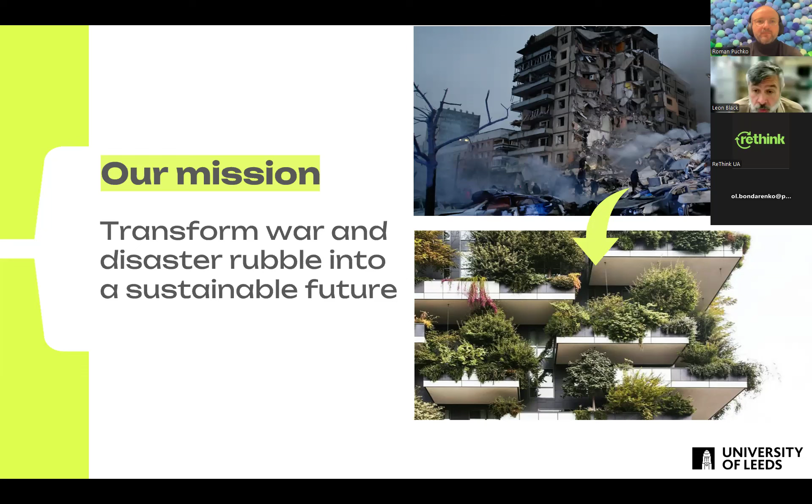We want to use it for total recycling of end-of-life concrete. Whilst the focus is on Ukraine, we're hoping the technology is equally applicable to other post-reconstruction operations, be those post-conflict, for example in Gaza, or also post-natural disasters.

The structure of my talk is split into 4 sections, starting off by saying why concrete has an environmental problem. Then I want to talk about recycled concrete aggregates and what they are. Then how these recycled aggregates behave when added to fresh concrete. And finally, I want to say how can we valorize or reuse recycled concrete powder, which is often considered somewhat of a problematic material for recycling, but actually holds great potential.

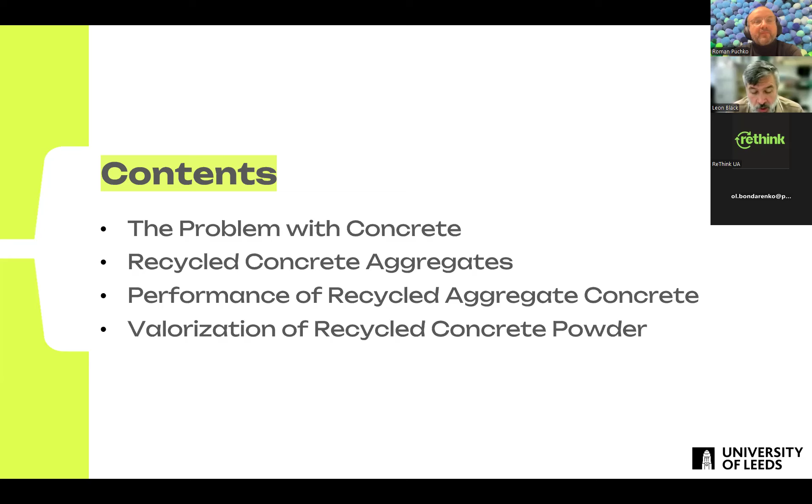Now, concrete has a problem. We use anything up to 30 billion tons of concrete each year, and that requires 4 billion tons of Portland cement. As a result, Portland cement production itself is responsible for up to about 8% of global CO2 emissions, and concrete production is around 10% of global CO2 emissions.

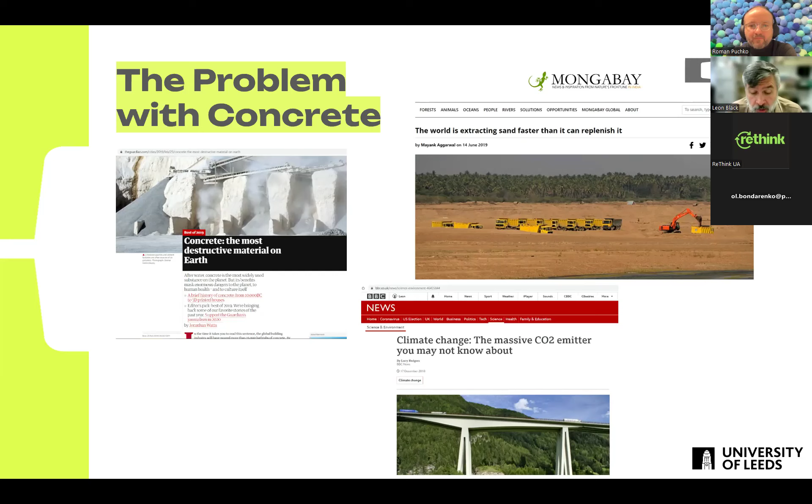In addition to these carbon emissions, there's also huge material consumption. Sand, for example—there was a report in India that sand is being extracted faster than it can be replenished. I was amazed to find out organized crime is involved in sand mining. I guess wherever there's money to be made, there's criminality involved as well. But it's causing environmental degradation, and we're trying to say, well, what can we do about it?

So if we go to more statistics around concrete, I've already mentioned the quantities of materials being used. But if we specifically look at end-of-life concrete, we produce 700 million tons of construction and demolition waste, CDW.

Of this 700 million tons of construction and demolition waste, about half is concrete, so 350 million tons per year. We know this can be recycled, but that doesn't necessarily mean that it is recycled.

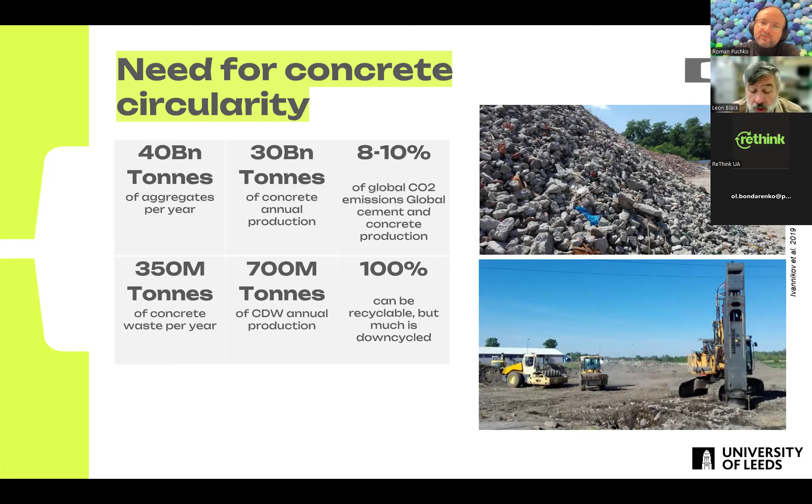In the UK, official figures say just under 94% of construction and demolition waste is recycled. But often this is in very low value operations. The figures on the right show a typical example. This isn't from the UK, but there is construction and demolition waste being reused simply to fill a hole. We can do far, far more than that, and we should.

This introduces the concept of a circular economy. Our current system is a linear economy, as shown. Many of you may have seen this figure before from Circular Flanders. It shows take, make, break: we extract materials from the ground, we make something with them, and when they're finished with, they're broken and thrown in a bin.

We're now moving more towards a recycling economy, where we may use something 2 or 3 or many times, but ultimately it still ends up being thrown in a bin. We dispose of it.

The circular economy, however, is what we're trying to achieve: introducing this concept of maintaining value within a system. Can we continually reuse a material with minimal loss of value, just to use resources more efficiently?

Now, for monolithic concrete, this is a problem. Most concrete is cast, not as prefabricated units, but...

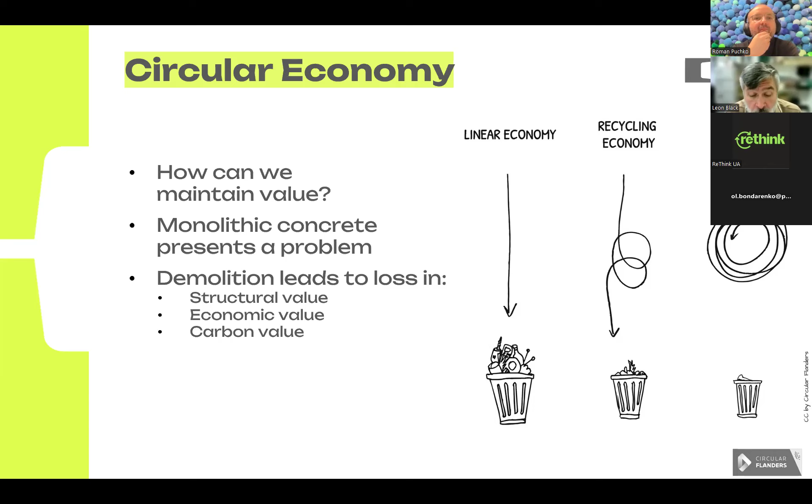So what else can we do? Well, if we're going to do things with end-of-life concrete, we need to know what it is. We can consider end-of-life concrete as comprising three components.

We have recycled coarse aggregates: gravel and stones between 4 millimeters and typically up to 20 to 40 millimeters in diameter. Then we have recycled fine aggregates, with particle size from 150 microns to 4 millimeters. And finally recycled concrete powder, a fine material less than 150 microns in diameter.

The figure on the top right shows recycled coarse aggregate. This was some material prepared in our lab. You can see that larger piece on the left-hand side.

Can I just ask, can people see my cursor when it's moving on the screen? I think so, yeah, we can see that. Okay, right, because I'm pointing to things on the screen and wasn't sure. I normally use Teams, so I didn't know whether Zoom allowed me to do this.

So yes, this piece of aggregate here, about 30 millimeters in diameter, 30 millimeters long, about 20 millimeters in diameter. You can make out this is the original aggregate, and it has mortar stuck to it.

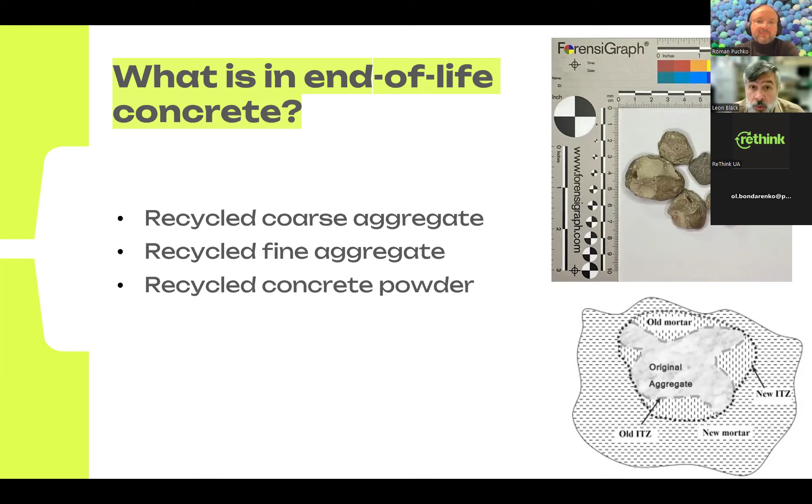In normal concrete, you just have the interface between the aggregate and the mortar. But in recycled aggregates, you have the original interfacial transition zone, plus one between original aggregate and new mortar, or between adhered mortar and new mortar. These ITZs are points of weakness, and we need to know more about them if we're going to improve our understanding of end-of-life concrete.

Now I want to show this quote. This was one of my starting points for looking at recycled materials. Thomas Rau is an architect who founded a company, Madaster, looking to develop material banks, considering the built environment as a material bank. His quote was, 'Waste is material without identity. If we don't know what we can do with a material, we end up throwing it away.'

So really what we want to do is say, what is recycled concrete aggregate's identity? What do we know about it? Well, we know that it's relatively inert, because otherwise it wouldn't survive within a concrete matrix. We know that it's dimensionally stable, we can't squeeze it, and it's not going to deform. We also know that it contains this adhered cement paste. So we know its size, we know it's not going to rot, and we know that this cement paste exists. That really is all we know.

We know the quantities as well. This figure on the right shows the mix on the left-hand side - these were the components going into some laboratory concrete that we were making, used as part of a PhD project. We crushed it to do some studies. We found that about 60-70% was recycled aggregate, coarse aggregate more than 4 millimeters in diameter, and then worked out about 15% each of recycled concrete paste and recycled fine aggregate.

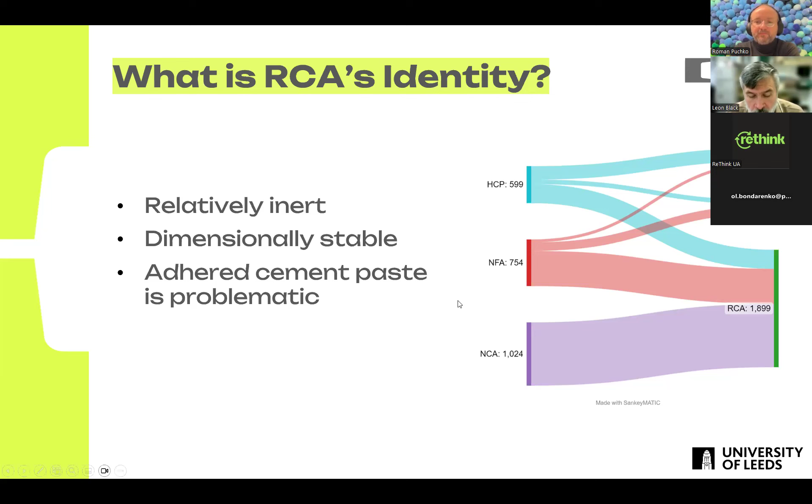So can we give recycled concrete more of an identity? What can we find out? What can we learn about recycled aggregates that, by understanding these properties, allows us to make better use of the materials?

Then looking at each particular size fraction, we measured the amount of cement paste stuck on each aggregate, and we measured the water absorption capacity. That's taking dried aggregate, putting it in a bucket of water, and measuring how much water is taken up and soaks into this slightly porous aggregate. We found that as the amount of paste increased, the water absorption capacity increased.

That's a problem for concrete, because this water absorption, if that water is taken into the aggregate, it stops the concrete from flowing. Contractors don't want to work with very stiff concrete - they want concrete to flow like water, I was once told. Anything less than that is a problem. So this water absorption capacity is a problem because it reduces the flow.

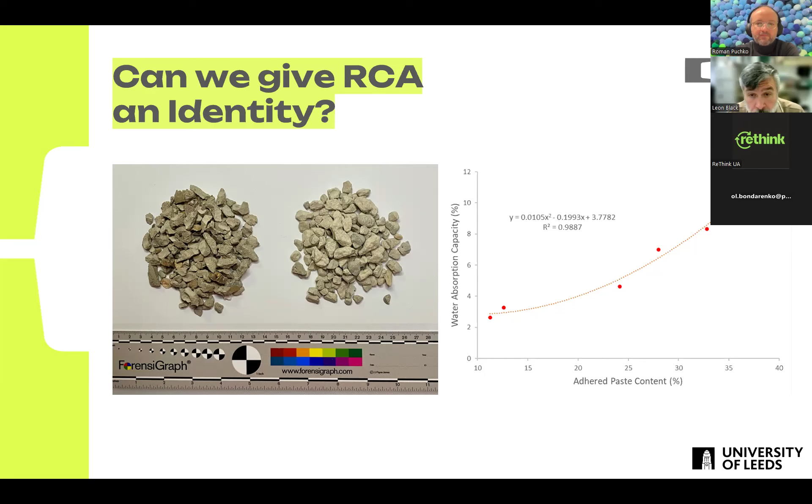But whilst we can do laboratory work to give this recycled aggregate an identity, to learn more about it, there are just realistically too many variables that can affect performance. The aggregate size and type is related to the water absorption capacity - as you get smaller aggregates, you get more adhered mortar, you get greater water absorption. You get a change in the relative proportion of surface that is interfacial transition zone. It just becomes incredibly complex, and whilst we can understand it conceptually, we don't have the resources to look at every single variable.

So what we started to do, as part of one project and also in S3, is look at data mining. There is lots of work going on around the world on recycled aggregates. We found 750 published mix designs - these had all been through peer review, so in theory they're all validated.

And we found 78 input variables. Everybody reports how much sand, how much water, how much aggregate, how much cement. Some people report the size of the aggregate, some people don't. Some people report the water absorption capacity of the natural aggregate that was used, some people don't. So we identified 78 different variables.

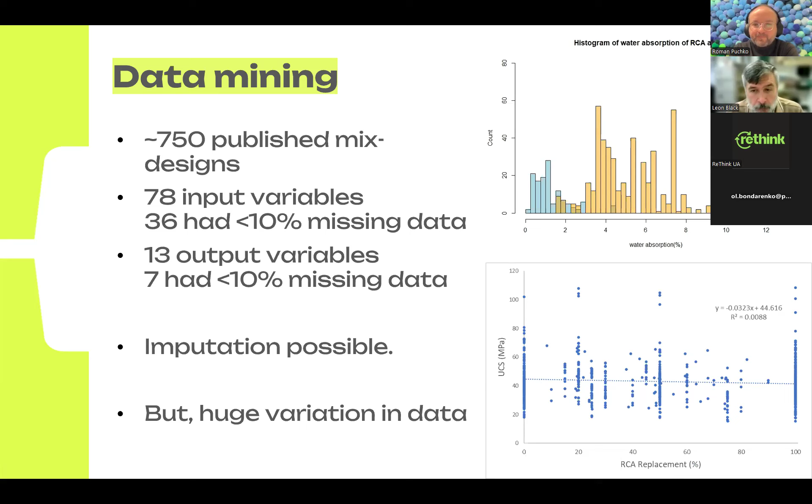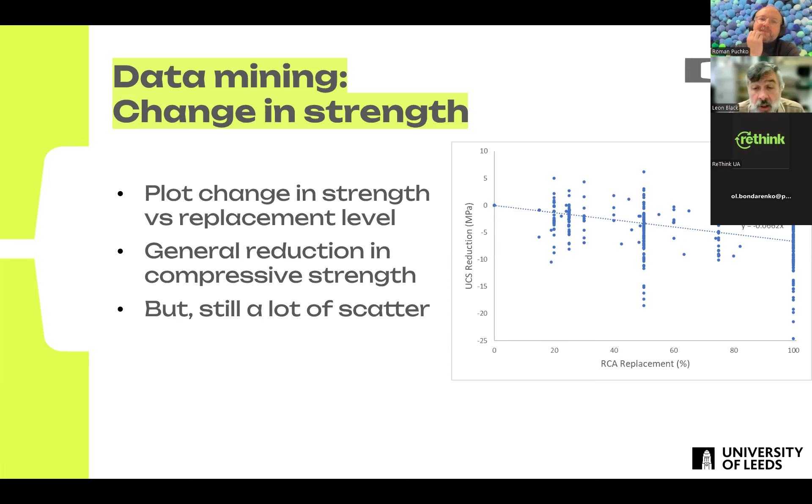This is where having these other input data, such as the water absorption capacity, becomes important. We started to plot the strength reduction as a function of replacement ratio for mixes with different water absorption capacities.

If there was a water absorption capacity over 5.8%, which is quite high, there was a more significant drop than if we could get the water absorption capacity between 4 and 5.8, or better still less than 4. If we actually get it below 3%, we're in a position where we can say this material is behaving very similar to natural aggregates. So we need to understand how we can remove this adhered mortar.

This is some of the work we've been doing in Leeds, and it's also some of what Everox are doing as part of their project in S3, which you'll hopefully hear about later.

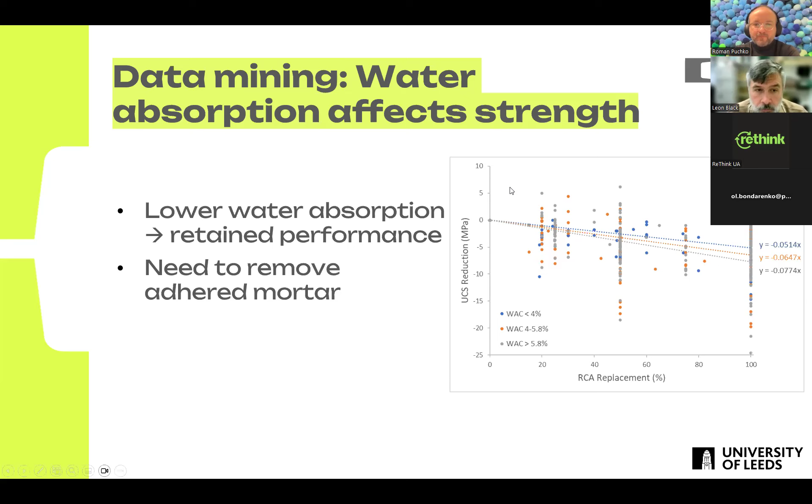We then said, we've got this recycled aggregate - instead of modelling, we're now looking back in the lab to see how this material behaves when you put it in concrete. So we made concrete with 100% recycled aggregate, replacing all of the sand and all of the natural aggregates, just using recycled and processed coarse and fine aggregate.

Because of the adhered mortar, there was a loss in slump - the concrete didn't flow quite as well. Our control mix had a slump of 140 millimeters, which dropped to 85 millimeters. But we could add a bit of additional water to correct for the slump, or we could add a super plasticizer, which brought the slump back to where it should be.

When we compared the 7-day and 28-day strength, we saw that by processing the aggregates there was no significant loss in strength. Indeed, in some instances there was a slight increase in strength, because the material we'd used in Leeds was a rounded aggregate, and once crushed it became slightly more angular, leading to a slight increase in strength. So we were able to see there really wasn't a loss in performance - we could correct any loss in slump, and make concrete comprising entirely of recycled aggregates.

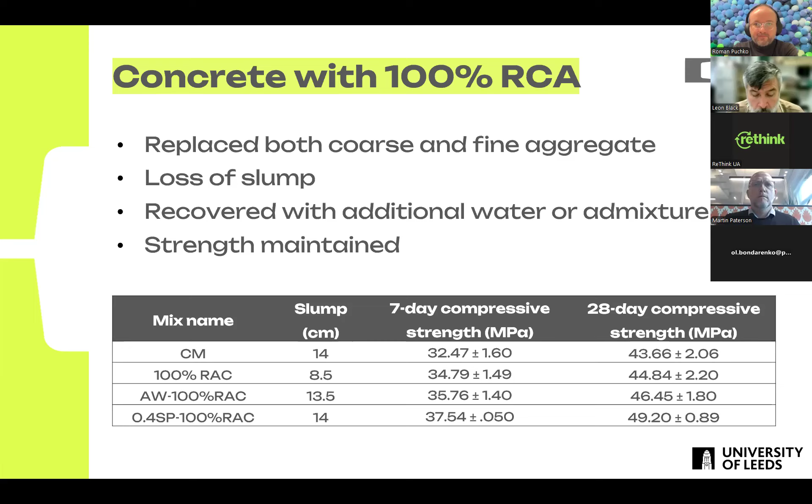But can we go further than that? We know that processing the aggregate improves performance, but going back to our earlier work where we looked at this Sankey diagram, looking at material flow, we know that about 12 to 15% of our recycled aggregate ended up as powder.

This is material less than 150 microns in diameter. We also knew that when we looked at the composition of this, about 80%, the blue material, was cement paste, and about 20% was recycled crushed quartz fines from the sand. So we said, well, what can we do with this? This is important because if you look at the carbon footprint of concrete, this cement paste accounts for about 90% of the carbon footprint.

So we're trying to say, well, how can we maintain some value within the system? If you think back to earlier where I was saying there was a loss in carbon value from monolithic concrete to recycled concrete, we're trying to say, can we reclaim that cement such that we're no longer having to make new concrete with quite the same high carbon footprint?

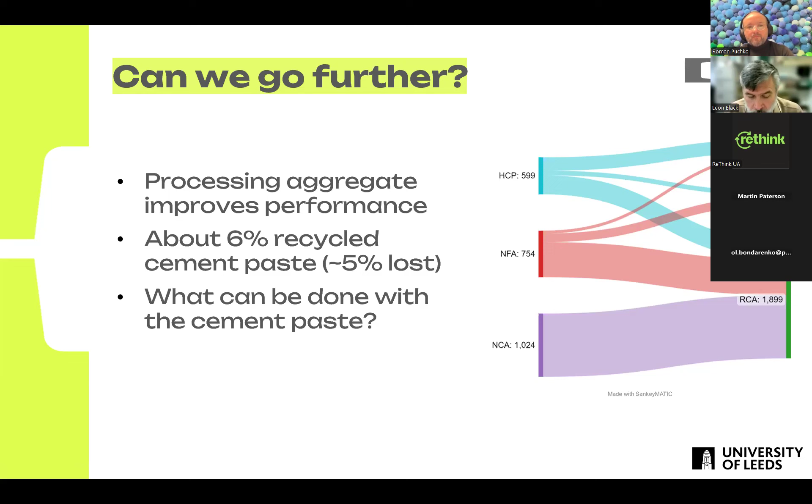So we looked at this material that was 80% cement paste. Ours was 80% cement paste, I've seen other samples anything between 60 and 80%. And we activated it by either heat and/or carbon dioxide. Heating drives off the water and can ultimately lead to some phase changes.

Adding carbon dioxide strips calcium out of your cement paste, converting your recycled cement paste into a mixture of calcium carbonate and an aluminosilicate that can act as a supplementary cementitious material. So it can be blended with cement, producing additional cementitious binder.

The standard test to assess the performance of a supplementary cementitious material is known as an activity index. You take 80% cement, 20% of your material, and if the compressive strength is greater than 75% of a reference mix, it's considered a suitable cement replacement.

What the table shows here is a range of the original material plus six different treatments. The as-received material has an activity of 60%, below this threshold. But all of the other treatments, either heating or carbonating, improved performance sufficiently that they could be considered suitable cement replacements.

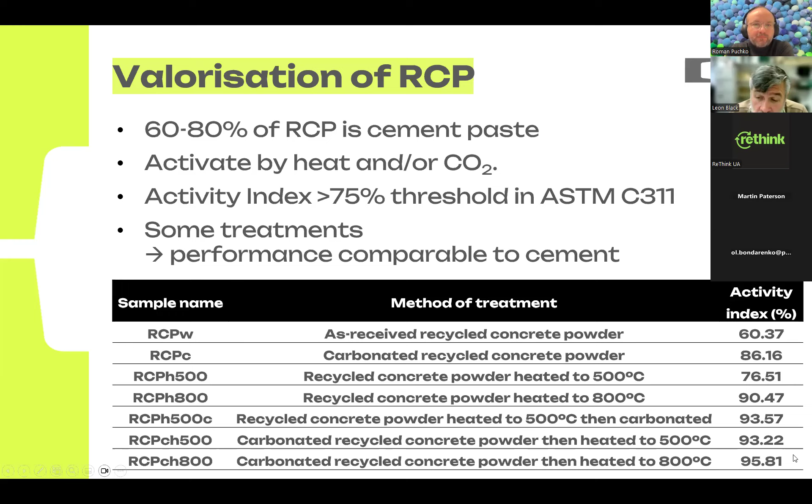Actually, combined carbonation followed by heating gave performance comparable to that of cement.

But we didn't want to stop there. What we're doing within S3 at the moment is to say, can this recycled cement paste also be used not just to replace cement, but to produce cement? Can we take recycled concrete powder and use it as a raw material for low carbon cement production?

One of the reasons why cement has such a high carbon footprint is that one of the raw materials used for its production is limestone. When you take the limestone and blend it with clay, heat it up to 1400 degrees, you produce cement. But that heating process, as well as the energy, gives off carbon dioxide from the breakdown of the calcium carbonates in the limestone used to make cement.

If you use recycled concrete powder, you no longer have that CO2 given off during production, so you can significantly reduce the carbon footprint of your cement production.

We're also looking at low energy approaches to producing cement, using a microwave. I can't show any results on this because - what day are we today? Thursday. This microwave furnace is actually being installed tomorrow, but all the samples are ready to go.

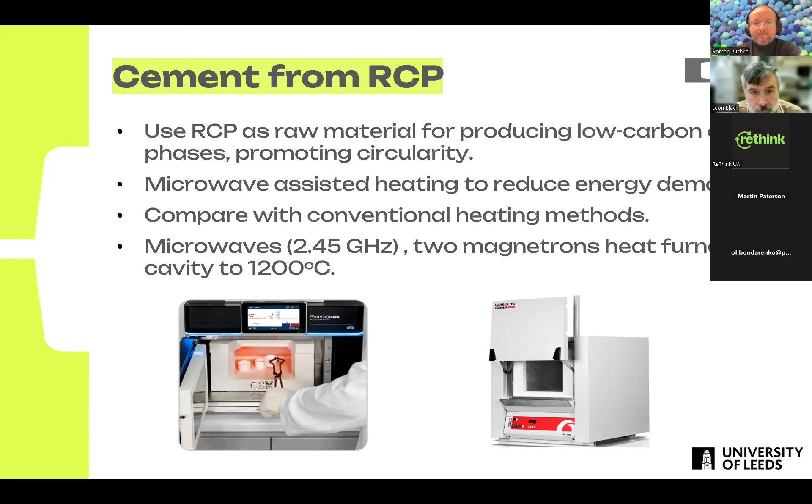In conclusion, this was just a light overview of what has been done. We need to do something more with end-of-life concrete than bury it as construction and demolition waste. We know that recycled aggregates can be used, albeit sometimes with an ever so slight loss in performance, but additional processing can improve this such that you get performance comparable with natural aggregates. The key thing here is removing this adhered mortar.

However, that does have some carbon implications - it uses energy to process, and financial implications - it costs money to process. But by separating and removing this adhered mortar, you can valorize the material. The cement paste produced from that can be used to either produce a supplementary cementitious material, reducing the carbon footprint of your concrete, or to produce a new cement itself.

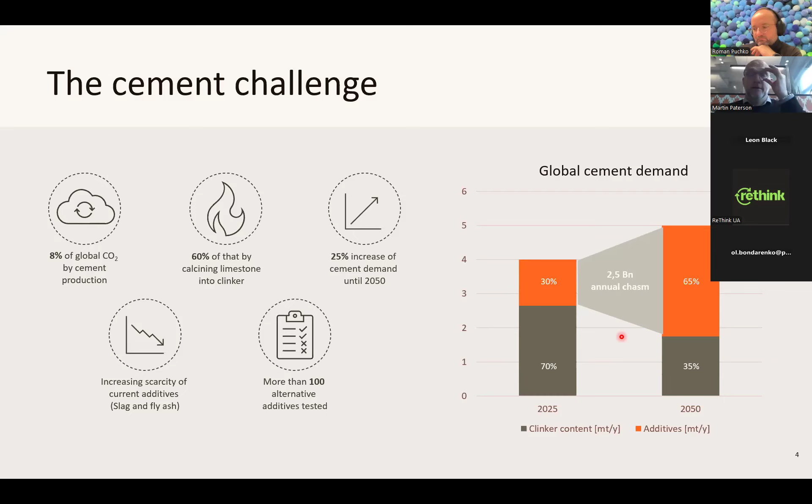And the question is which ones can be used, and it has to be a combination. But definitely, concrete waste is a very promising and good alternative—not only because of the high reactivity and high potential, which Leon already explained, but also due to the availability. So if you look at the global market...

There's roughly 3.5 billion tons of concrete waste produced every year, and that doesn't consider the landfills we've made over the last decade—this is newly produced feedstock. If you talk about 3.5 billion tons of feedstock material, you're talking about roughly 1 billion tons of cementitious product which is at the moment being landfilled, thrown away, or used as road-based aggregate, so downcycled. This is the material we have to recover.

And that is, if you remember, the 4 billion tons of annual production, that's 25% of the global cement production. And that is the 2% we are targeting to reduce the carbon footprint with only one technology, with only one SCM. So please keep that in mind.

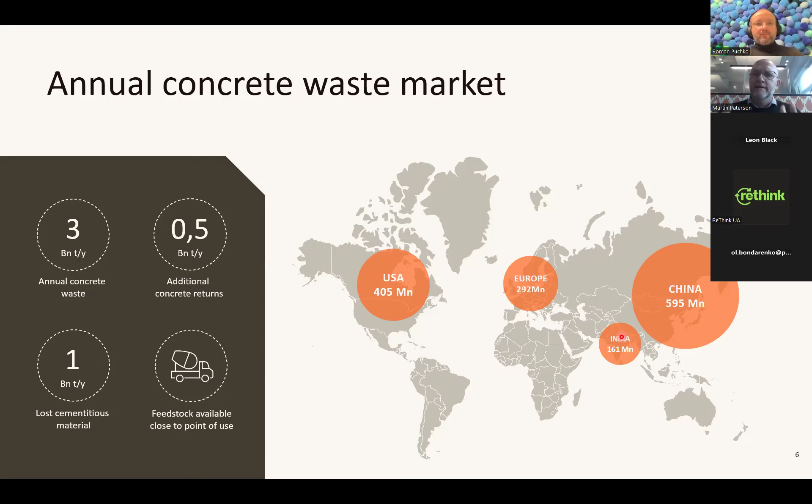Another good thing about concrete waste is that it's available close to the point of use. So you don't need to drive to any mine tailings outside there or in the mountains to find some seldom stones. This feedstock is available in the big cities where you're building it again. So on top of having the availability, you have almost no logistics if you do it right.

And that makes it a really circular, high available SCM for the future. And that really determines our mission at Everox. We want to phase out virgin materials in concrete completely and make use of local available circular product which can be used in order to build the future of tomorrow.

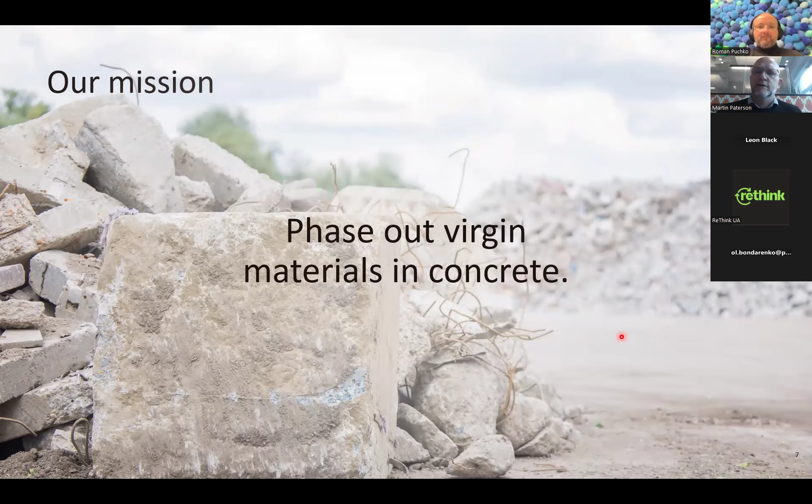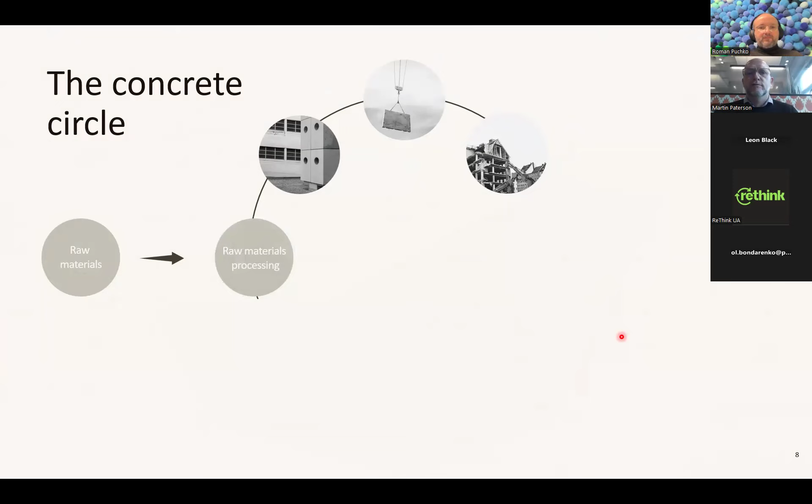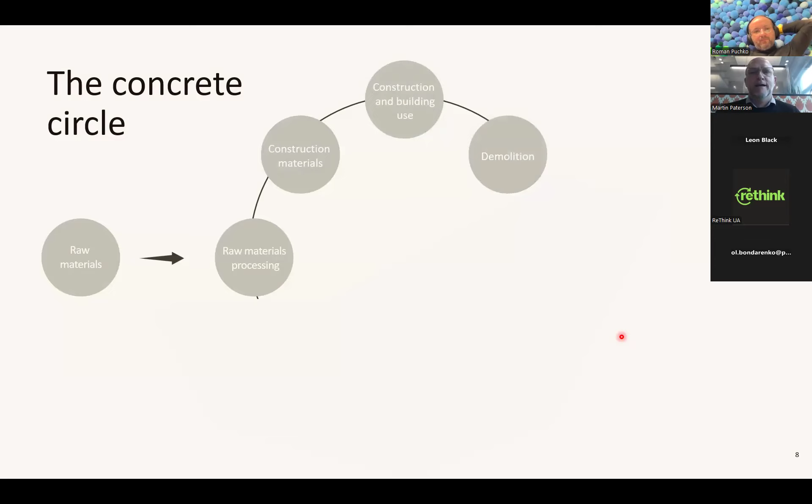Just a quick reminder of how it works. So in principle, today we have deep quarries where we get the raw materials, we put it into some cement plants to produce clinker or cement. Out of that, we produce construction materials, we build the buildings, and then after the end of the lifetime—20, 30, 40 years—the building is being demolished again. And nowadays, best practice, it's being landfilled or in the best case, downcycled to make use of the aggregates in it.

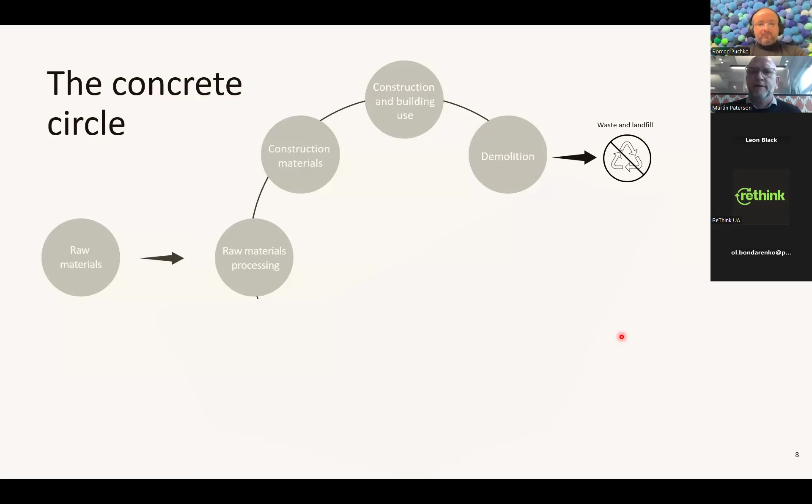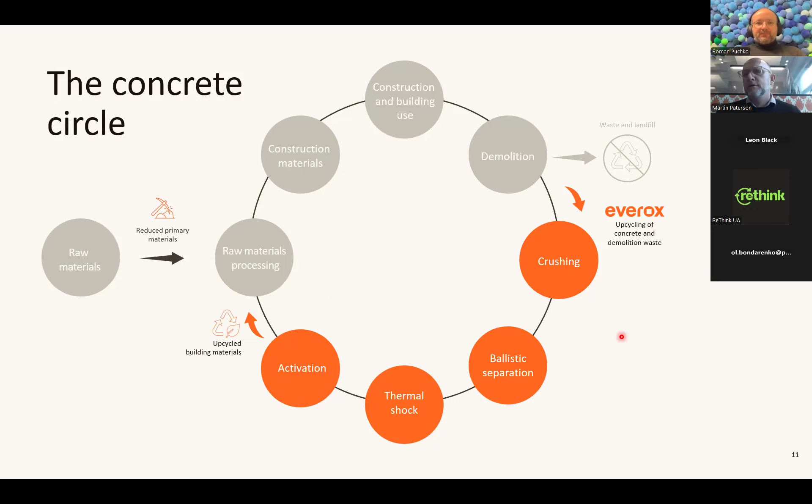What we are doing at Everox is we want to close that circle by crushing the material, separating it, using different technologies to have a more advanced separation, and then finally activating the old cement paste so that we can put all of our products back into that circle and thereby reduce the requirement for primary materials. This is what we call the concrete circle, and this is what we're working on.

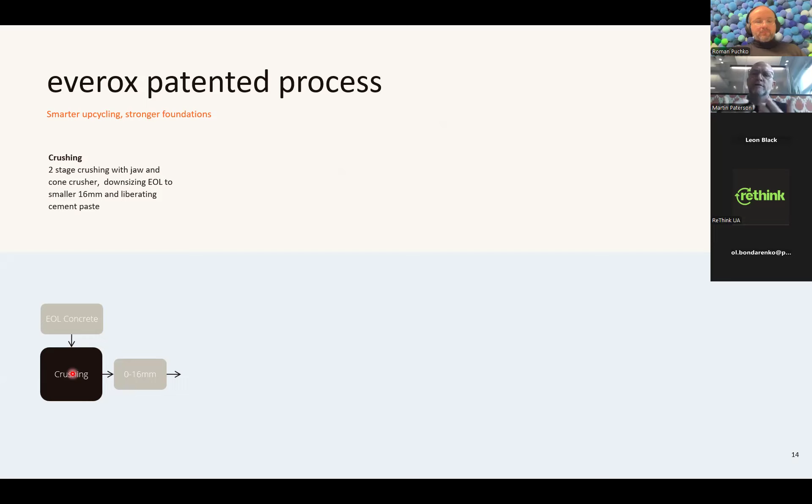So a little bit more in detail, how does our patented process work? We receive end-of-life concrete on site. We do crushing in 2 stages. The essence of the crushing is to keep the integrity of the primary materials—we don't want to destroy the stones. We want to more rub off the bond between the cement paste and the stone.

Out of that crushing process, we get a 0 to 16 millimeter material, which goes into our ballistic separator. In the ballistic separator, we get 3 fractions out of that machine. Basically, it's a fast-turning rotor which hits the material, and then depending on the particle size and weight of the material, it goes to different areas of the machine. So we get 3 fractions out of that.

Number 1, and that's why it's here in orange, is the recycled coarse aggregates. This material is measured with high-speed cameras at the outlet. If the quality is good enough, we take it out of the process and use it as a replacement of natural gravel. If the quality is not good enough, if there's still too much cement paste on it, we recirculate it—we put it back into the crushing and run it one more time.

The 1 to 4 millimeter fraction is actually the one which is the most difficult to clean. That's the small sand particles with still a lot of cement paste around it—very difficult to use in construction because it has a super high water absorption if you don't clean it properly. So we put it into what we call the thermomechanical separator, our TMS. So you have the stone, you have the cement paste around it.

We shock heat that bond so that at a temperature of 350 degrees, the stone expands while the cement paste shrinks, and then you crack off the cement paste from it. So it's a very efficient way of cleaning the sand, and accordingly we get a very dry and clean sand out of it, high quality with a water absorption actually below 6%. We call it recycled fine aggregates—that's the orange one here. And the cracked off cement paste, we call it the ultra fines.

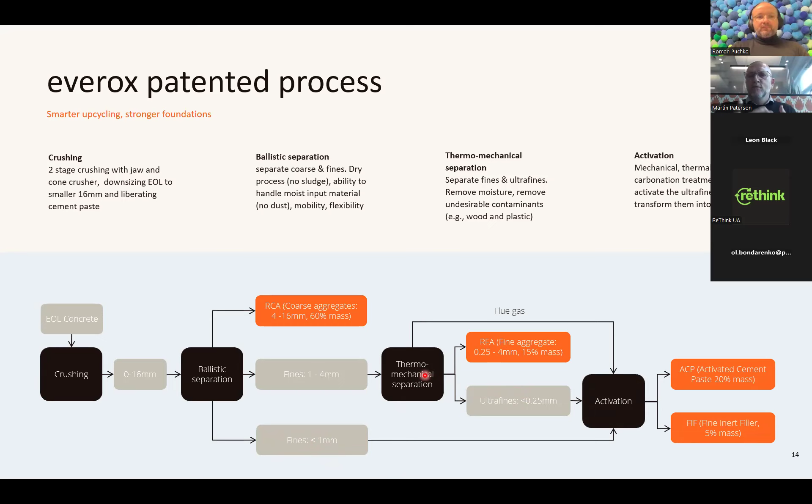As I said at the beginning, for us the purpose is, just to remind you, to keep the integrity of the aggregates, take off as much cement paste as possible from them, and then use the fines from the ballistic separator and the ultra fines from the thermomechanical separator to go into the last process step, which is activation. We don't only want to use that material as a filler in concrete or cement, we want to use it as a reactive binder, and thereby we need to activate it. Leon also introduced some different options to activate it.

What we are doing is we start with a selective grinding process, so mechanical treatment, where we only grind the amorphous content. Leon also said there's still a lot of silica in that, depending on where you are in the world and the nature of the concrete waste. Here in the Netherlands, we see up to 40% silica in those fines. So we only want to grind the non-aggregate part, and that's what we do by selective grinding.

Then after the grinding, we do a silica depletion. We have an air separator where we can take out the quartz content, and that's what we call the fine inert filler. This is also a final product which you can use. It's 90% pure quartz, and you can use it as a filler in concrete or even for other industries. We're talking, for example, to the glass industry, which is very interested in that material as a grinding component.

But again, our main focus is on cleaning up the cement paste, getting the silica out of that, and then we're basically using the CO2 coming from the flue gas of the thermomechanical separation, so our own internal CO2 source, to carbonate the material. What comes out of that is the activated cement paste. I will explain afterwards a little bit about the quality of that material.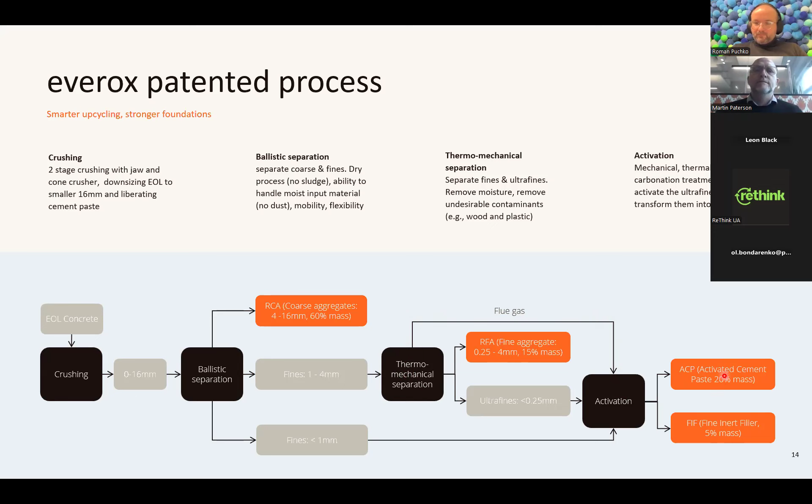So in summary, in a nutshell, we put waste concrete into our process without any waste, without any byproducts. We get, depending on the nature of the concrete, but this is a good rule of thumb, 60% RCA, 15% recycled fine aggregates, then a small amount of fine inert filler, and roughly 20% of the activated cement paste.

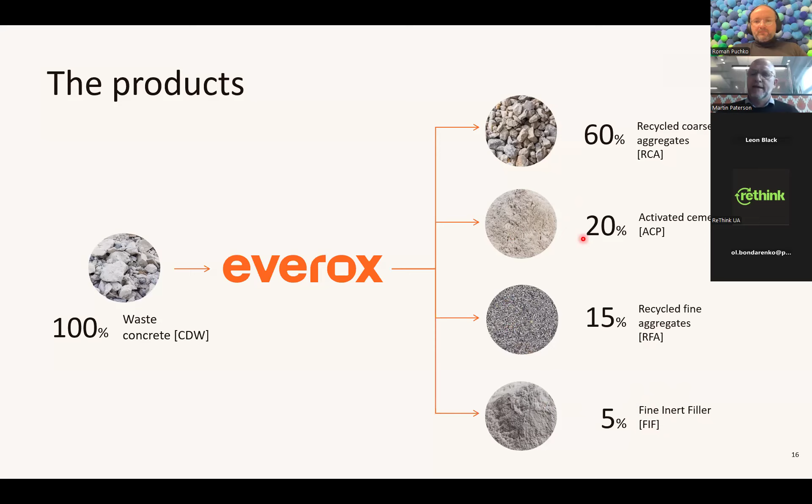Looking at the quality of that material, what we see now on a constant basis is that the aggregates we get out of it are very clean and can be used to a high degree in concrete as replacement of primary products. The coarse aggregates have a water absorption level below 4%, the fine aggregates below 7 or even below 6%. And the activated cement paste, I will show more details later, but from the reactivity perspective, we are in the range of Class F fly ash at the moment.

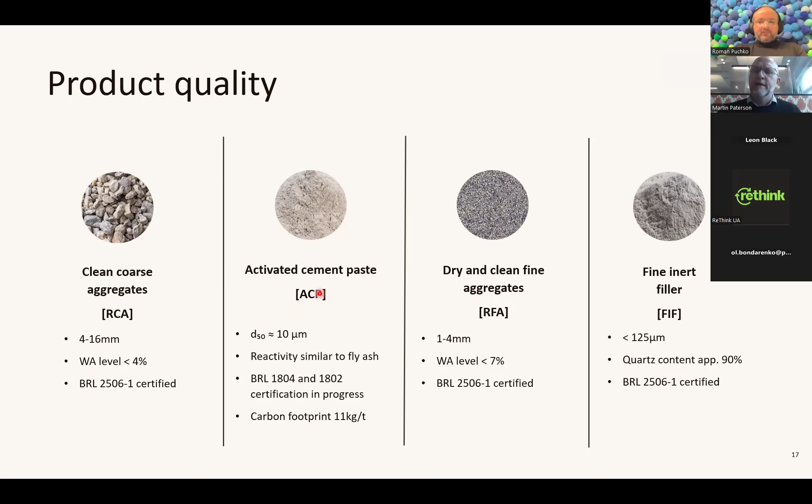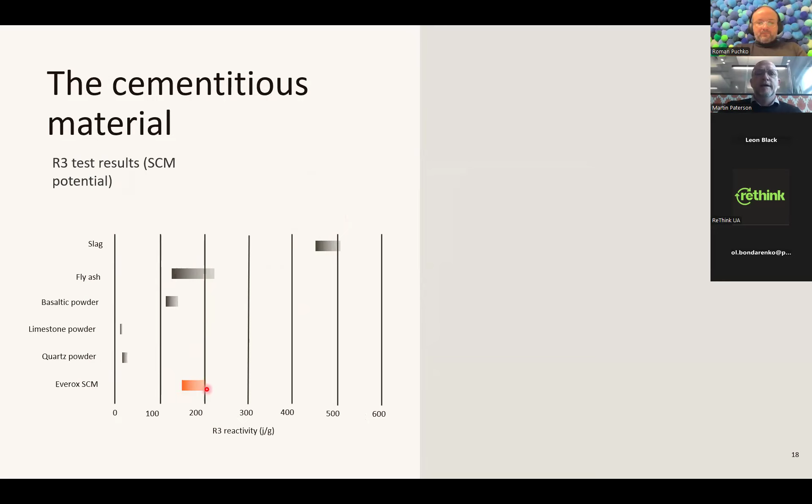Here's just a quick overview of different SCMs, and a little bit depending on how we produce the material, but we see reactivities around 200 joules per gram. Leon also explained the test you need to do if you want to classify your material as an SCM - you need to reach 75%. What we are reaching at the moment is already above 90%. If we're replacing fly ash or slag, we see around 70% reactivity or strength activity index after 28 days. So very good results, which clearly show that this material can be used as an SCM.

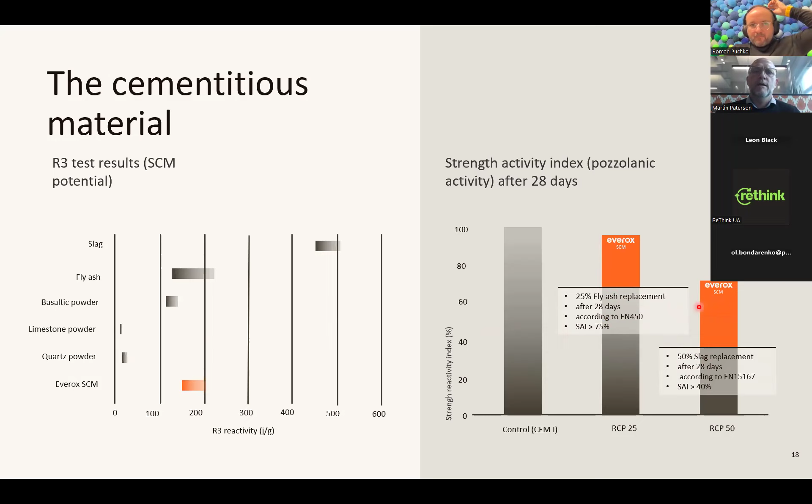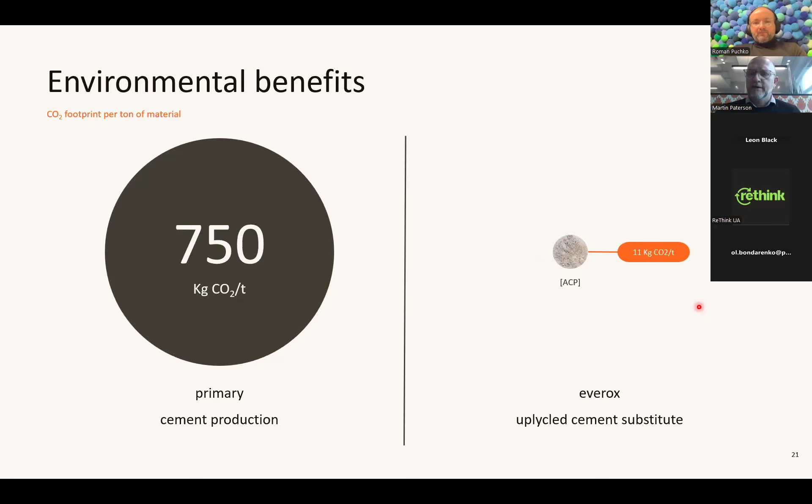In terms of carbon footprint, we have received a third-party LCA, and meanwhile our product is also classified in the European database and in the Dutch database. So the CO2 footprint of our activated cement paste is only 11 kilogram per ton. If you compare that with primary cement production, depending on the efficiency of the cement plant, the 750 is the European average today. So we have a 60 to 80 times less CO2 footprint than primary cement, which I think is very interesting with a local circular material.

We have also meanwhile published a new patent for the ballistic separator. We've made a lot of improvements to that machine to make it more intelligent, more reactive depending on what comes in, and adjustable on the spot.

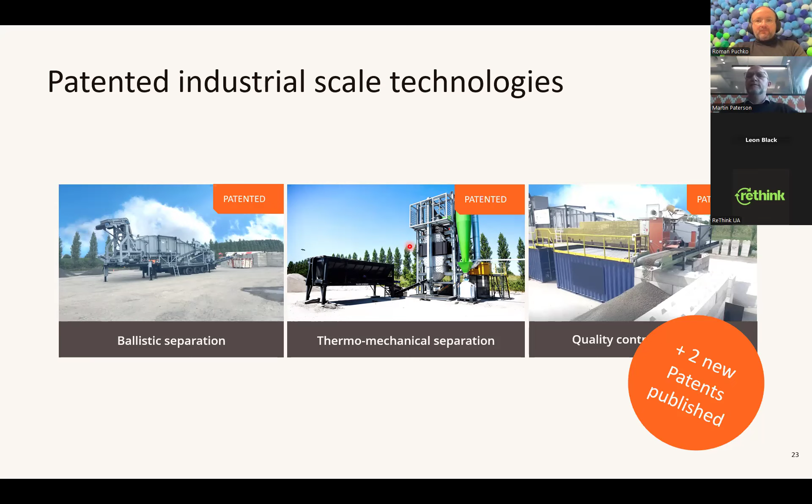And we have also received a patent now for the entire process I just explained: putting waste concrete into the machine, into the crushing, and getting activated cement paste out of it.

Just a quick overview of where we are as a company. We have been operating these machines for many years and have done a lot of tests on the equipment.

Since 2018, we have processed, I think, more than 20,000 tons of waste concrete. We have used it also in different case studies.

In those structures we have been replacing up to 100% of aggregates, up to 30% of cement, and also using our fine inert filler, showing very good results — strength developments very close to primary cement.

These case studies are ongoing. We have also been building different structures like smaller bridges, pavements, and foundations, all of which is being measured.

But most important, and I'll explain in the next slides, is that we have launched a partnership here in the Netherlands with Dura Vermeer, the second biggest construction company in the country.

We are now building our first industrial scale plant, able to process up to 500,000 tons of waste concrete per year. That plant will be operational from next year onwards.

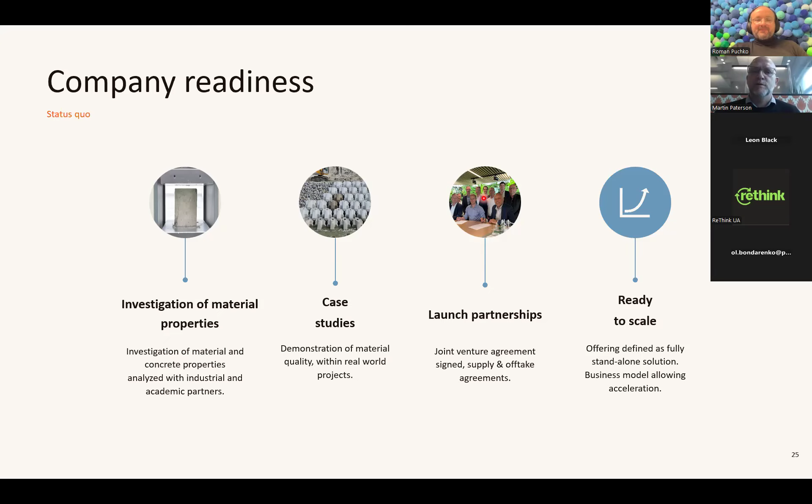So we're scaling up. We want to implement that technology globally now and make sure that this 3.5 billion tons of waste concrete is soon used in a more upcycled way.

So the plant we're building looks like this. I don't want to go into all the details, but this is what I explained on the flow sheet.

We have the crushing down here, the ballistic separation, thermomechanical separation, all that. What you see here is the activation part, and then the storage for the powder material.

This plant has a footprint of roughly 50 by 60 meters. It will be operational next year, phase one in Q1, and then six months later the full plant will be operational.

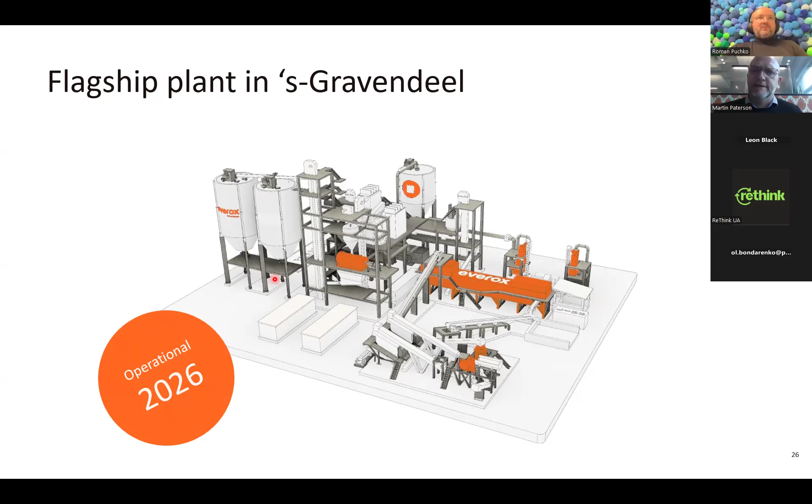We will start with processing 150,000 tons per year here due to the permits we have, so we will only operate 5 days per week, 8 hours per day.

We have already signed offtake agreements, or at least LOIs, with 10 potential off-takers. So the market is very interested in receiving those goods and materials.

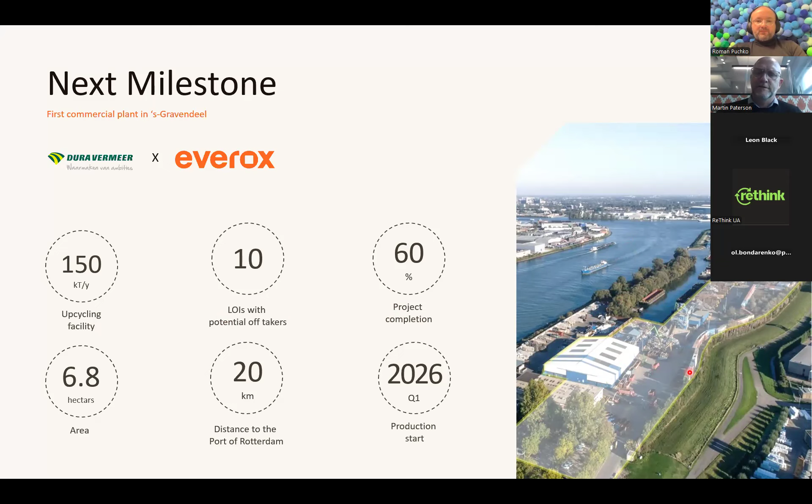So what are we planning as a company in the future? We are building this first-of-a-kind plant now in order to demonstrate that whatever we have been evaluating in the lab and in the pilots over the last years also works on fully industrial scale. This will be done next year.

We want to build 7 more of these joint venture plants where we are part of the operation, in strategically important locations worldwide. We need to prove that no matter what waste concrete feedstock we have, no matter its composition, it works in our process.

We also want to demonstrate that the system economics work, that we can enter new markets with everything related to that — marketing of the material, certification of the material, finding new off-takers, all of that.

That's why we want to work in these joint venture structures with strong local partners who already have a presence in the market and can help implement that solution.

After these first two phases, we want to step back a little as the operating partner and move more into what we call a franchising phase, so that every recycling company, demolition company, concrete manufacturer, or construction company in the world which believes this is a good concept can take our products, our portfolio, and flange it to their existing portfolio.

We will then, of course, support with the technology, but also be a partner in bringing those products into the market and helping with servicing the plant going forward.

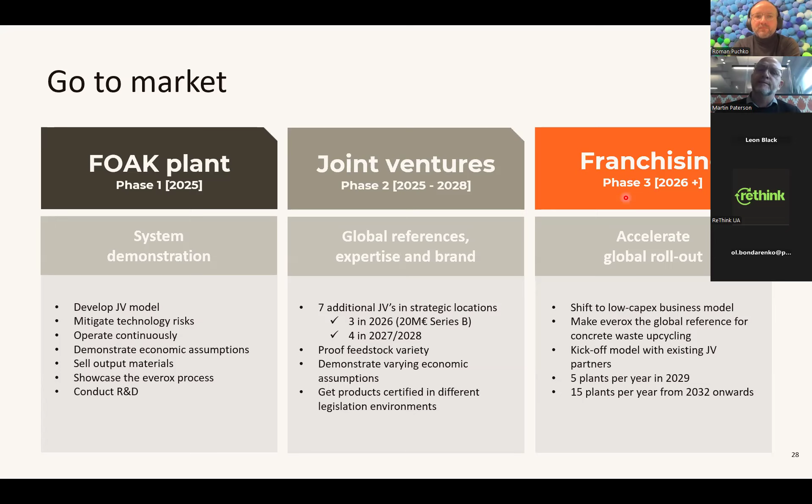Not to go too much into detail, but it's important to understand this is a concept which works without any subsidies, without any CO2 taxation, without any green premiums. It's a very solid business case. And of course it depends on where you are in the world.

These numbers are from the Netherlands. It can be better or worse, but we've so far calculated around 60 to 80 business cases, and it is super solid. In the Netherlands, with one ton of waste concrete, you can generate 40 euros of revenue, most of it coming from the activated cement paste and from the RCA. The costs are relatively low, and the bigger the plant, the better the economy of scale. The EBITDA we have on this plant is very solid. It's a very solid business case.

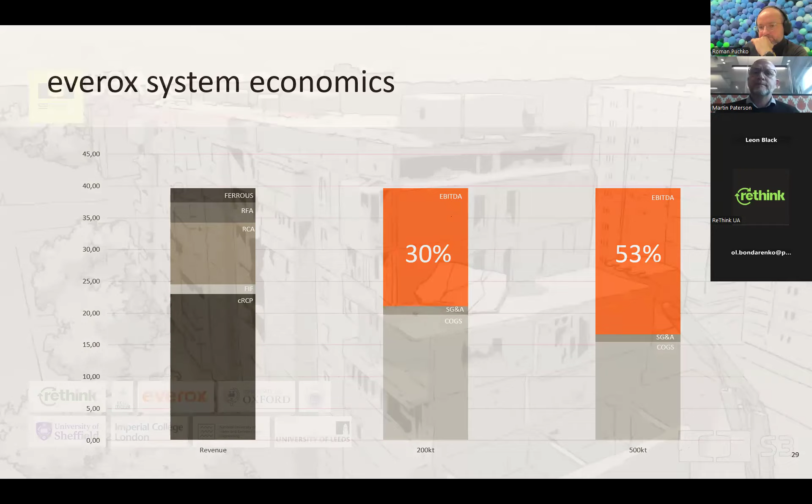Now, that was the Everox part, which I already alluded to. We started the S3ROU project last year, funded by Innovate UK, with all the partners you see here. I took the liberty to use this video just to show who the partners in the consortium are, so I'll let it run in the background.

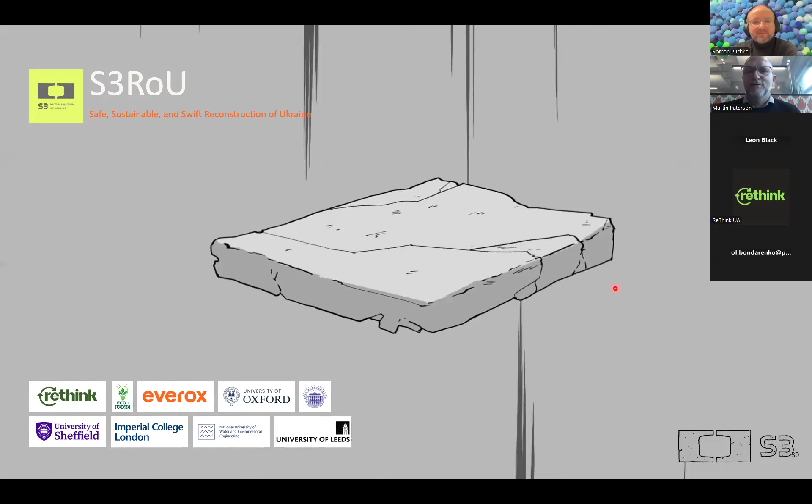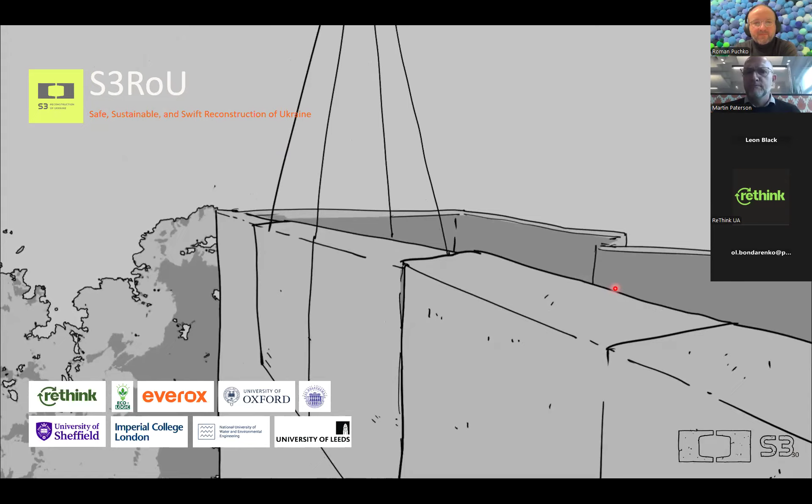The idea of this, as Leon alluded to, is to evaluate what to do better with end-of-life concrete, how to use it better than landfilling or downcycling it. The machines are now operating in Kiev, Ukraine. We have industrial partners and academic partners, and of course ReThink is there to support and showcase our collaboration.

The machines you saw in the picture in the Netherlands are now being built up in Kiev again. They were commissioned a couple of months ago. One of our industrial partners, Ecoplus Logic, is operating them. We're upscaling now, producing quite a lot of material, and the project will run until the end of April next year, when we'll decide how to proceed.

It's a wonderful showcase to see how those machines work with the waste concrete available in Ukraine, and how we can deal with other contaminations in the rubble we find there. It's not only plastics, wood, and glass—there are other contaminations in the feedstock material, and we're learning a lot. I think it's a wonderful collaboration.

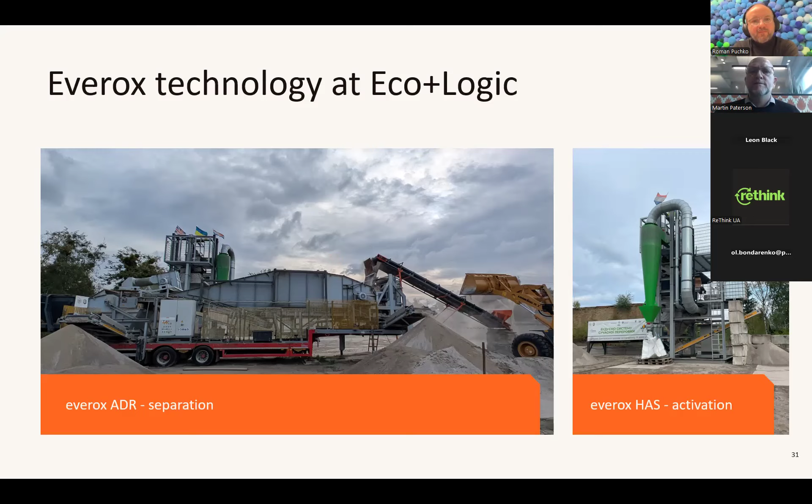If you look at the amounts—it's difficult to find reliable numbers, but from what I know of the Ukrainian concrete sector, the demand for building is very high. It's actually double the amount of the Netherlands, and of course there's an unfortunate reason for that, but roads and buildings have to be rebuilt. We're looking at roughly 20 million cubic meters of concrete needing to be produced every year.

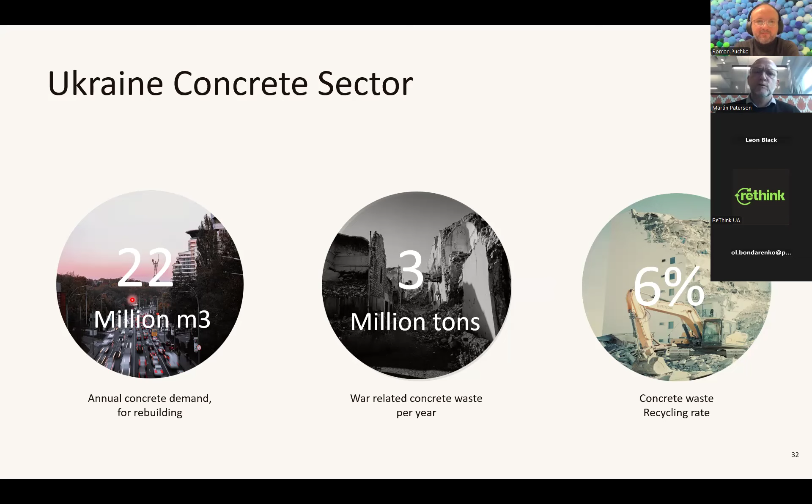The concrete waste related only to the war in Ukraine is roughly 3 million tons, and out of that we are only recycling 6%. So there's a massive opportunity to use more of that material to fill the gap and have a more circular building industry, and make sure the landfilling happening now is not required anymore. I think that was my last slide. I hope I wasn't too fast, but I'm happy to answer the questions coming, and I'm looking forward to the Q&A.

Thank you so much, Martin. I truly believe your unique process, your unique innovation, is a way to give identity to waste. That was mentioned in Leon's presentation—the words of Thomas Rau, that waste is something without an identity, material without identity. But you're kind of an essential link to give this identity to a material and really give value to it. And I really hope that after 2026 you will still consider Ukraine as one of the key locations for your next plants. We will be very happy to work on that as well.

Indeed, let's move on to the Q&A. We already got some questions, even in the registration form, and we are still receiving them right now. I encourage everybody to ask your questions in the Q&A, but I will start with those asked before. So, what is the cost, or let's say the price, of recycled concrete in the European Union, and do you export it?